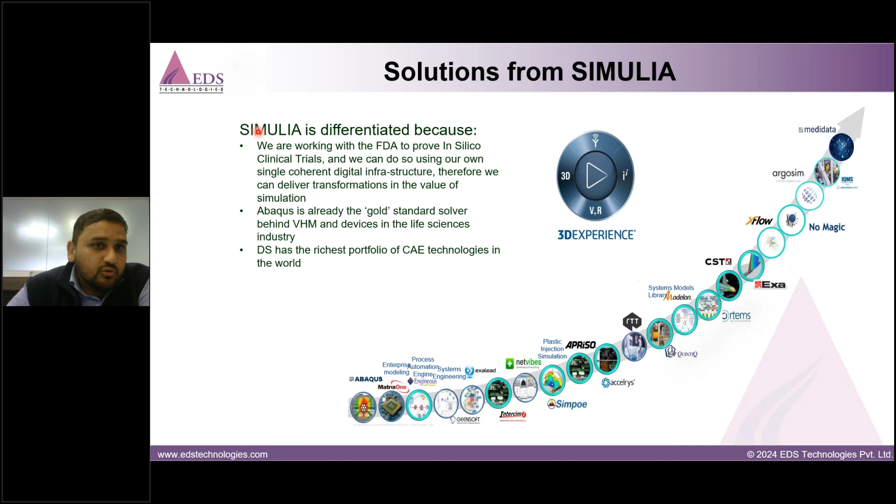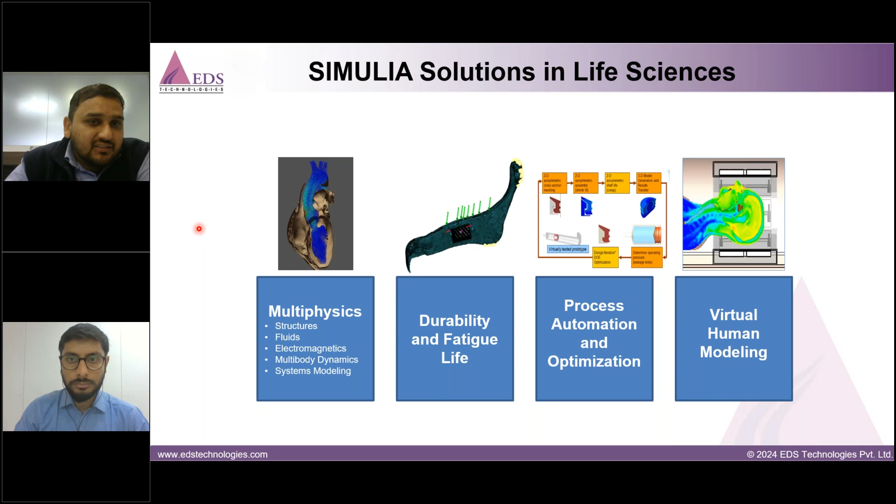And the fourth one is virtual human modeling, where you can scan the body, and you can produce a lot of DICOM images, and these images can be used to make a 3D model out of your scanning data. And then further you can apply boundary conditions and real-time loading conditions to understand the real-time scenario. So these are the sectors that you can tackle without any problem using the SIMULIA tool. Okay, so now we will start talking about those three domains that we discussed.

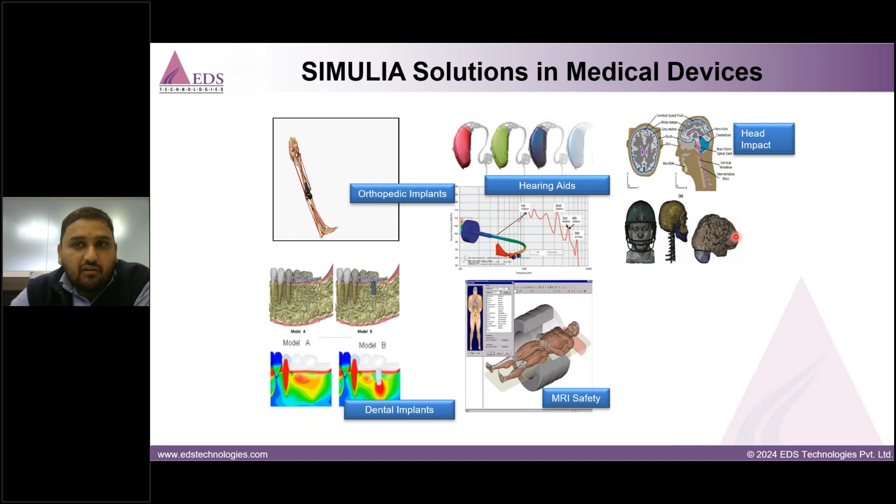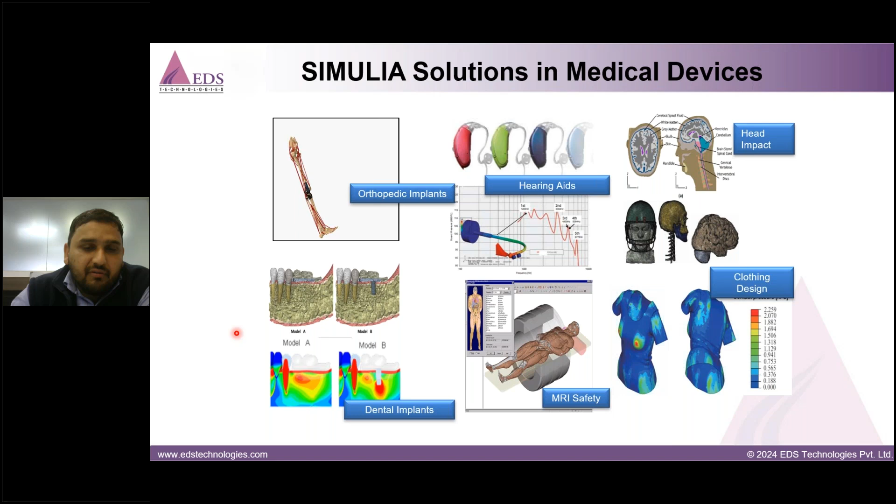These are kind of recent examples that we have done for our prestigious customers across pan India. Obviously we have not included every domain, but most of the things can be considered here.

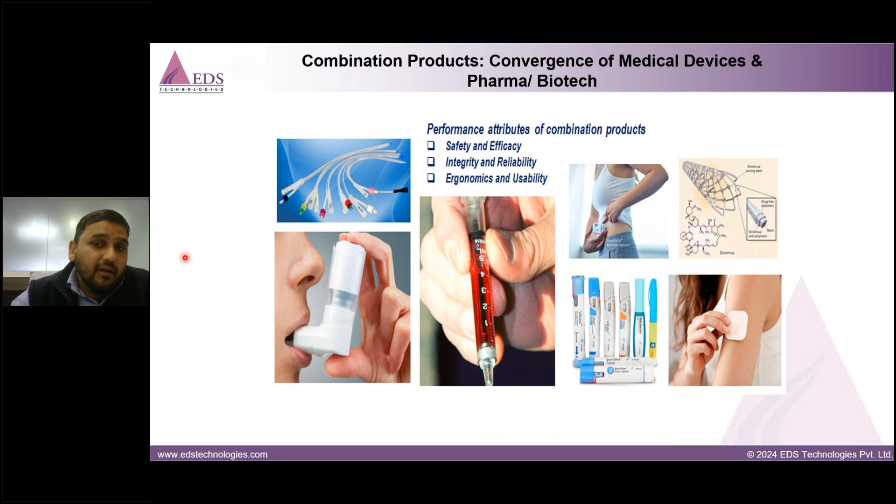Okay, so now considering those 3 points, we have done a few of the studies for our customers, which I wanted to reflect here. Okay, so we will consider different examples, and simultaneously we will talk about what are the key performance metrics and what we would like to achieve using those simulations.

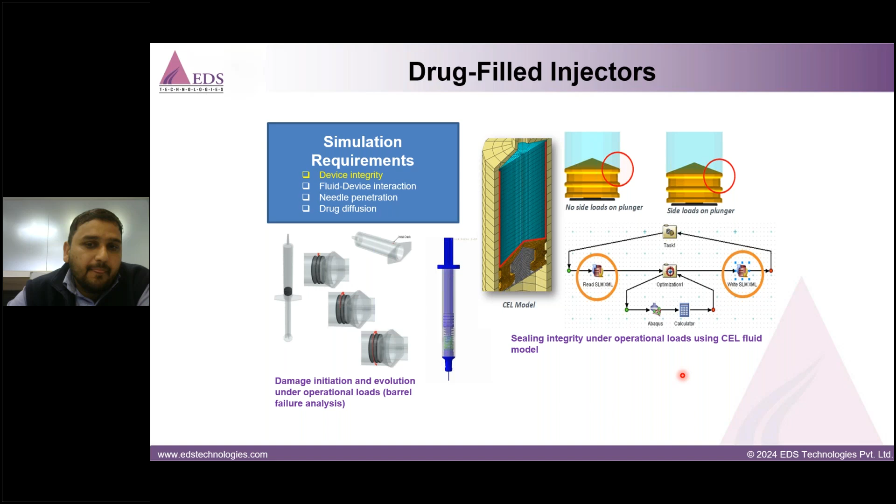And the technique we used here is CEL. CEL is basically the Coupled Eulerian-Lagrangian algorithm. Okay, so if you see, just a second, yeah, this is the animation video. So we press the liquid and it is coming out from the injector, and you can see how it is falling in the specific chamber. So this is basically a 3D flow simulation to optimize the syringe and the needle design for outflow velocity, and to understand the plunger force and where the leakage is, and how we can prevent it.

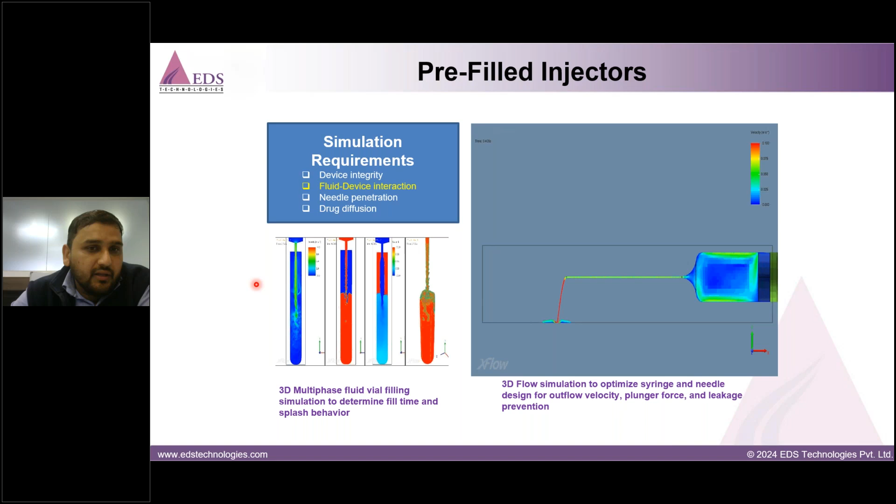So this is a kind of 3D animation video, and on the right hand side you can see the velocity, and on the left hand side you can see the multi-phase fluid filling simulations where you can understand the filling time and the splash behavior. Okay, so this is a need currently in the medical domain, and we have seen a struggle specifically by CAE engineers in how to set up the analysis and what things are required. So do let us know, we can support you. We have medical customers who are doing this activity day in, day out.

So it is again a part of drug-filled injectors, but we have done it in a different way. So we try to cover the third point, which is needle penetration. You can see this animation video we have created using Abaqus. So we have skin layers, which include a number of different layers, and every layer has its own material properties and natural phenomena. So we try to consider them in a mathematical way of modeling. So you can see first we created a hypodermis layer, then a dermis layer, then epidermis layers, and then we define a certain porosity level because it is not that solid, we do have pores. So then we define the porosity level, and then you can apply a solid interaction.

One you can define as a solid. So the needle was considered as a Lagrangian formulation, and the human skin basically was considered as a Eulerian medium. Okay, so then we start the penetration part. So the needle is basically penetrating into your skin and causing the tissue damage.

Okay, so on my left hand side, you can see the biological occurrence of the skin, and on the right hand side, the full physics. So if you ask me, Varun, what is the uncertainty? Is it close to reality? How close is it to the experimental data? So I will not say anything. You can just simply go to these experimental curves and the simulation curve, and proudly say that the result was as accurate as it can be, somewhere around 92%.

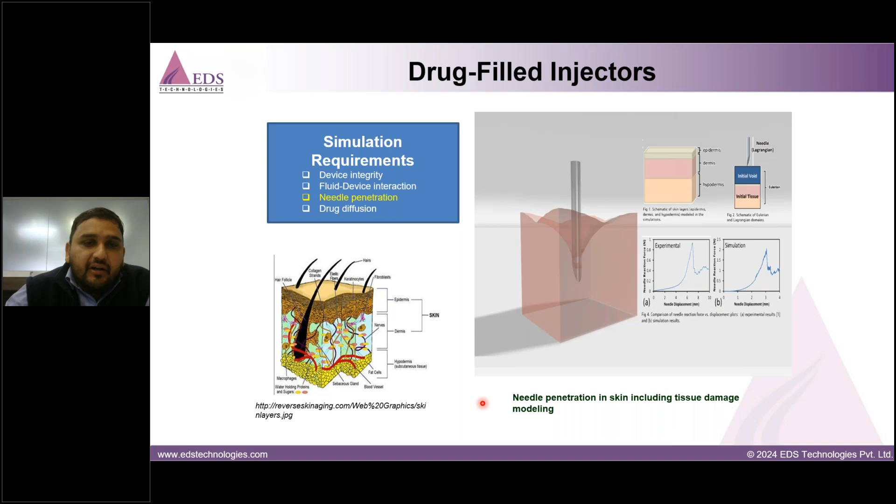And those 8% was delay just because of these properties, because every person has different skin criteria. But considering the generic values, it can give you a result something similar to 90%. Okay, so that's the kind of accuracy Simulia can bring. The other one is the drug diffusion. It's again a simple phenomenon. You create a chamber and then you apply the fluid domain and see the tissue expansion.

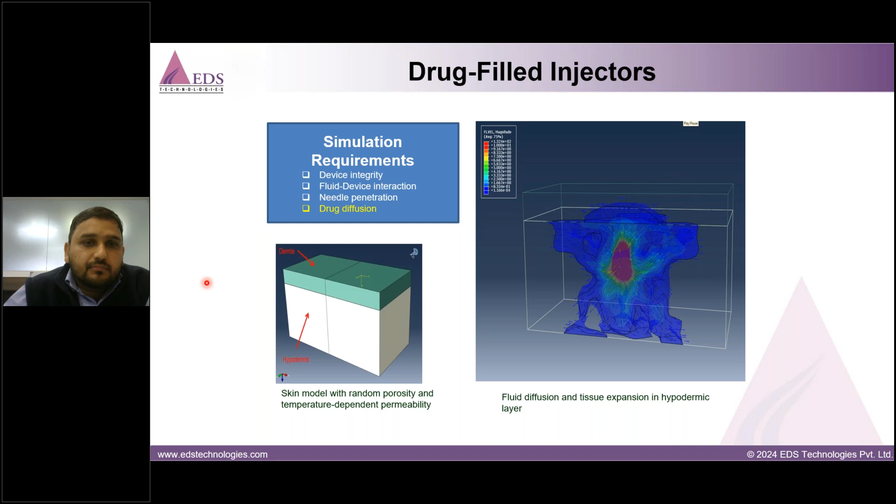Okay, so that's four criteria which we have accomplished using the same model, using the same fundamentals. Okay, so the same fundamentals you can apply in different parts. Considering the skin behavior, you can also perform analysis of how to inject the liquid in the human body, and which specific angle we have to use. So this kind of study has also been done.

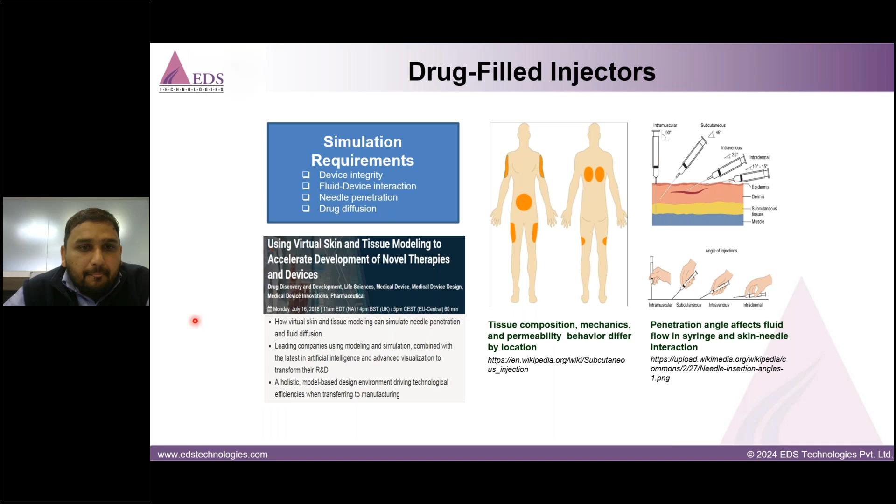So on my right hand side you can see different angles have been used, and different force and different penetration power have been used. Okay, so that kind of tissue composition and biological biomechanics investigation can be done using Simulia.

Then I would like to talk a little bit more about sensors, biological sensors, where you can understand the collaborative kind of investigations. So if you are in the human experience industry, where you want to create an environment for your patients where not only can they heal their wounds, but at the same time they can fully recover from their challenges.

So these are the kind of domains and segments we have created under one of our products, which is called 3DEXPERIENCE, which is like Simulia but in a different environment. So it does have different role capabilities. Okay, so here you can see end-to-end digital solutions were created, and a total life cycle combination happened.

So you can start with some specific challenge, and then you can do design and development, and then you can do the simulation parts, and then you can go to the manufacturing section where you can do the production part, and then you can do the enterprise operational excellence where you can individually monitor the performance of your product. Okay, so that kind of experience can be done using any of the advanced levels of technology.

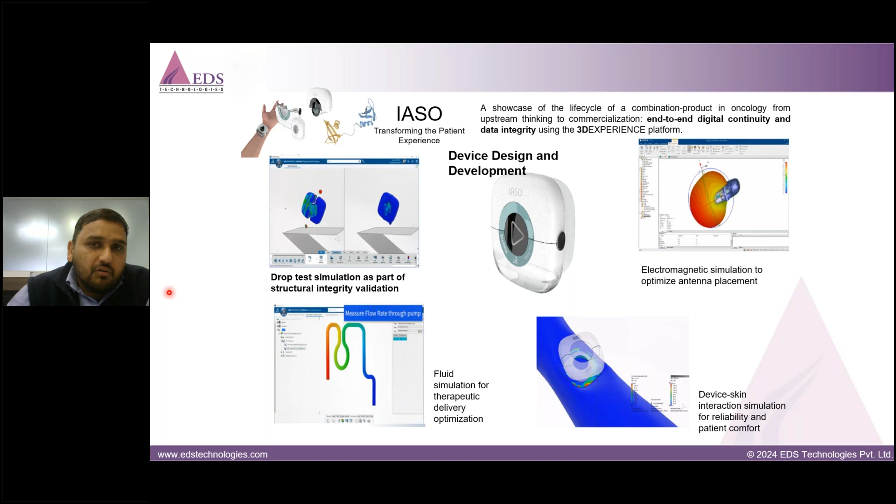So it's a step-by-step process. First you do the structural mechanics, then fluid domains, then a Maxwell-based solver, then you perform a finite element based solver. So different solvers were integrated, and we have created one combined joint study.

Okay. The second case study that we can reflect on here is drug-eluting stents. I know a lot of manufacturing companies are currently working on this specific domain. And when we started this work with different hospitals, with different industry segments, we came to know different requirements have been simulated using this tool. And we tried to create some fundamentals.

And on my left hand side, you can see the first intention was to understand the material behavior, how to perform the in vivo dynamic loadings. Life cycle is one of the key criteria, and optimizations, then blood flow modeling, and finally the pressure driven diffusion. Okay, and obviously there are certain criteria for the performance metrics which are reflected on my left hand side here.

We will not go into detail about the biological aspects of the human body and how this artery is developing. It's a slow progress happening over a period of time, considering our unhygienic lifestyle. So they try to create some dynamic kind of stents.

We started first with material behavior investigations. We don't just jump into the model part and create it. First we try to understand the fundamental principle, like how the physics is taking place, which material is best, and how the stress phenomena is taking place. These are stress-strain plots where a lot of hysteresis develops under different loading and unloading conditions. We also try to see the behavior in the form of material transformations like martensite or deformation rate, and then we started the designing part.

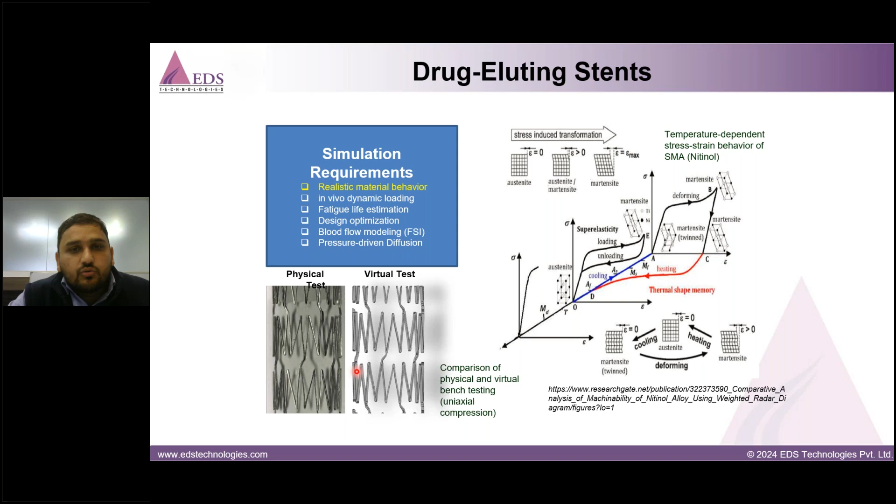Most of the time, nitinol material is the one used by many industries. We have also used the nitinol material. It was created smoothly in CATIA environments, and then we have done the simulation part in Abaqus. On my left hand side, you can see the physical test, and here is the virtual test.

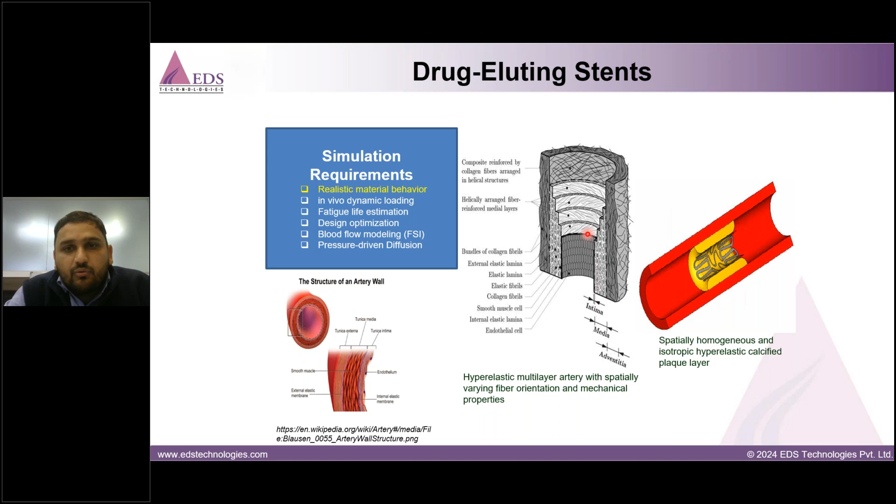This is to get into more detail. We try to deep dive into the stent phenomena, and we wanted to understand how many layer formations there are, same like human skin, but what is happening inside the hearts. How the multi-layer artery is working, and which material we need to define as hyperelastic or simply elastic conditions. To make it very much realistic, we try to understand a little bit about the biological aspects, and then we created this model. We have done this crimping, expansion, and insertion part here.

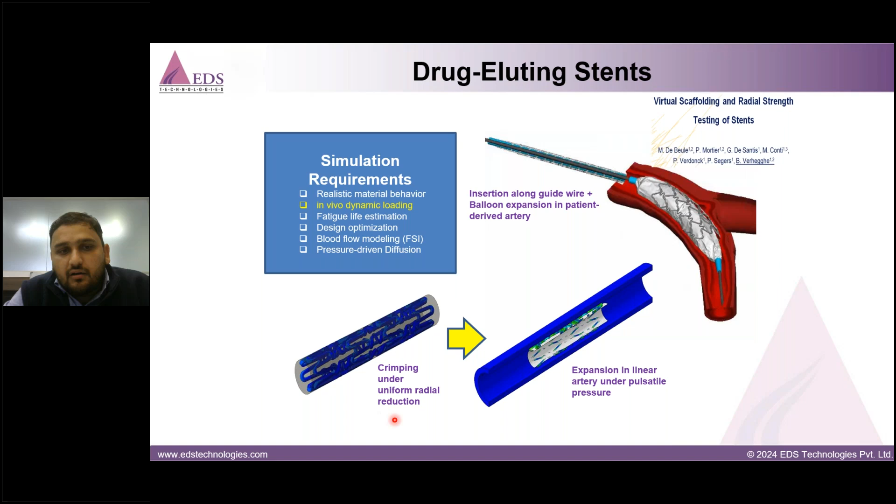This project was done for AIIMS and PGI Chandigarh. We supported them in creating this model, and they have deployed the stent in the human body without any problems, and the result accuracy was also very good. You can see how realistically it can be done under different dynamic loading conditions.

This is one example we would like to show, a great project created by the Dassault team. You can see the stent here. Let me maximize it. This coronary stent is subjected to cardiac cyclic motion in a living heart model. That model was created by a team of panelists into the medical domain, into the simulation sector, as well as the medical sector. Jointly we have done this project, and you can see it is very much beneficial to understand the physical significance of the stent in terms of cyclic motion.

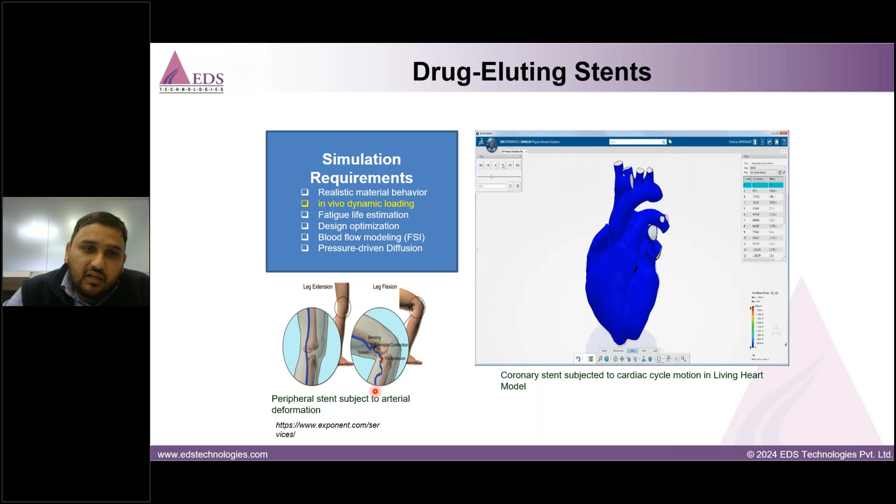The same thing can be deployed in other parts of the human body. Here, a peripheral stent is placed to understand the arterial deformations. That is also nowadays into consideration.

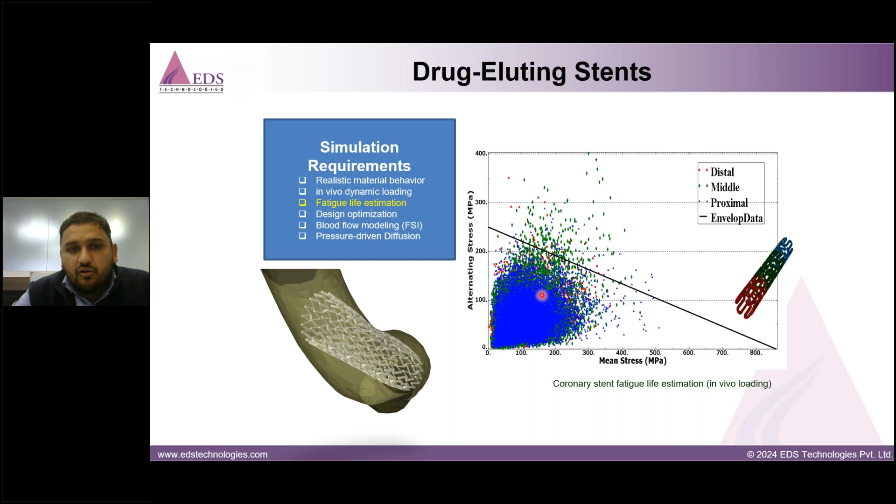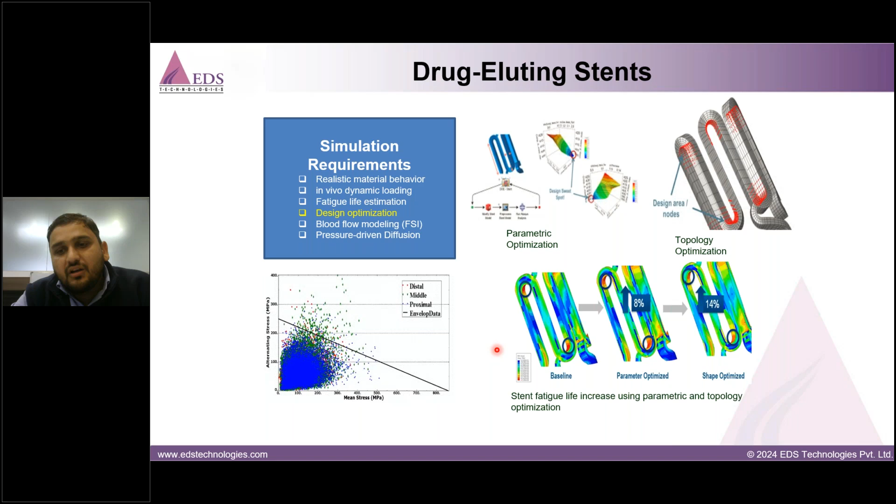Considering those parameters, a lot of improvement has been done, and if you see, local stresses from the beginning till the third stage have been improved a lot. These kinds of possibilities can be achieved through topology optimization.

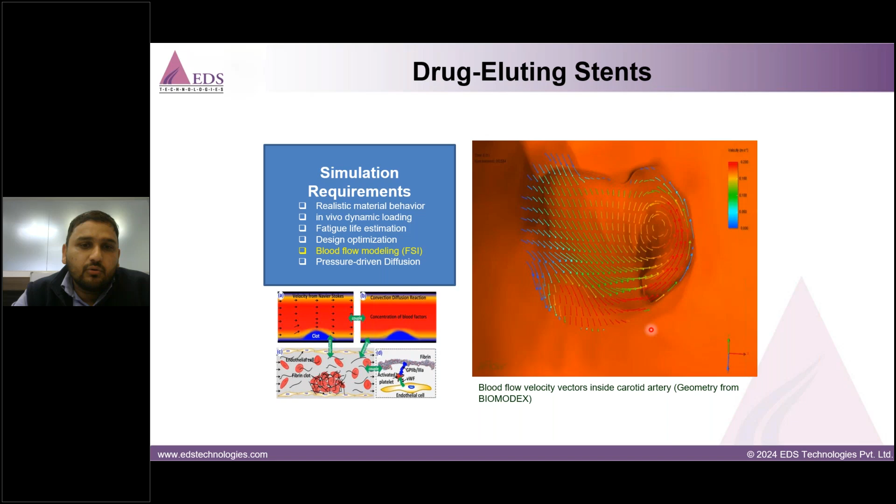And we also understand the velocity vectors, how the blood flow is taking place when you deploy a stent in the human artery. So this is a kind of vector sign that can also be used, but obviously you can also create a streamline to understand the internal behavior. And these are some of the diffusion vectors and concentrations of drug inside the arterial wall to understand the sensitivity of the stent geometry and the contact pressure between the human blood and the stent.

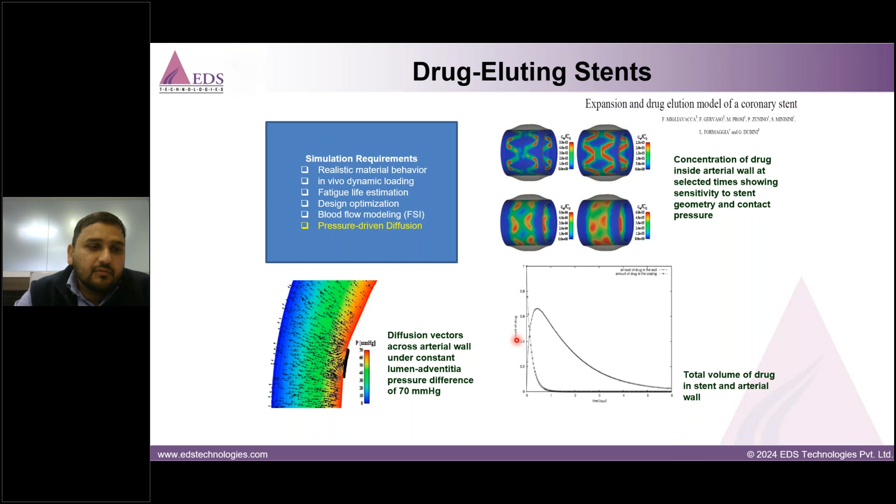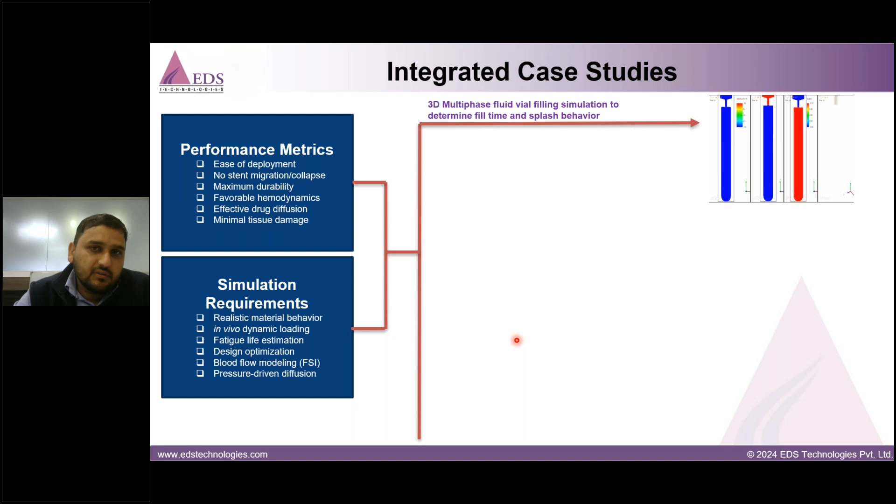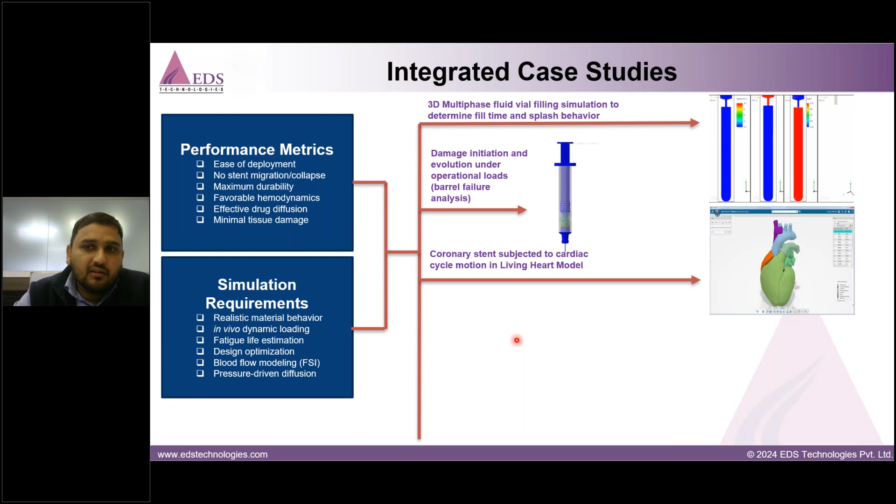Okay, so now I would like to create one nutshell for all the case studies that we have discussed, in one particular slide. These were the criteria, metrics and requirements, so you can create 3D simulations of the liquid and solid model. You can understand the initiations and evolutions under different loading scenarios, understand the coronary stent behavior, and create mechanical loading conditions like crimping, expansion, and obviously a kind of penetration can be done here.

So considering medical device as one of the prime importance, these are the basic analyses where a lot of manufacturing industries are struggling day in and day out. So I would request you try to use Simulia, considering the accuracy and the possibilities we have, and it can definitely give you a better enhancement.

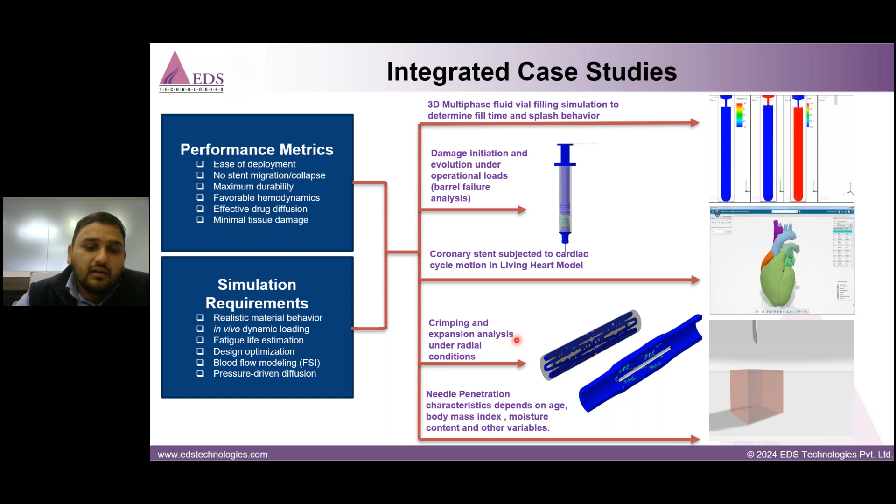In terms of medical device industry, one more example I would like to reflect here is Nimhans Bangalore. Recently they have used Simulia. They have scanned the human body, specifically the brain part, and tried to identify the tumor in the human brain. It was initially very difficult for them to decide which solver to use, considering the accuracy. Proudly I can say we were in touch with Dr. G. Venkatasubramanian from Nimhans, and we supported them to create the 3D model and identify the stress localization in the human brain, so that they can stop the growth rate of the tumor.

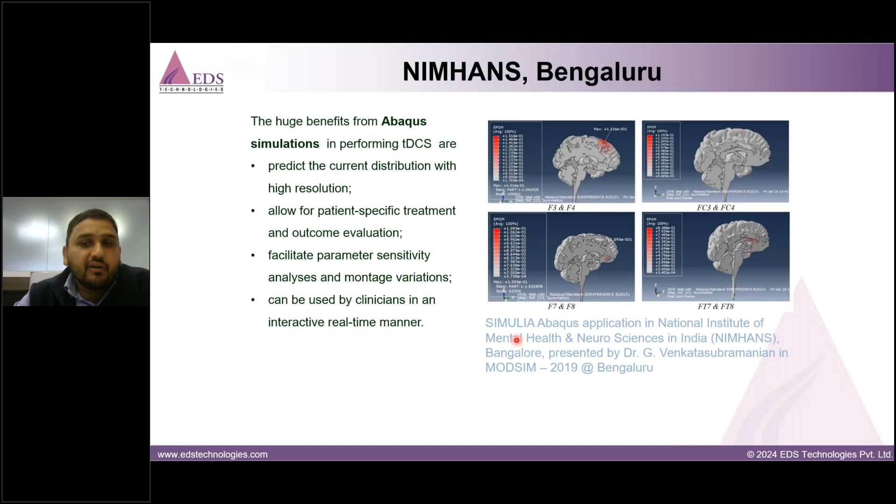So in a nutshell, let's conclude it. Considering this fast growing domain, we know it is very challenging and difficult, specifically for a CAE person, to design such components in an efficient manner. But we can help you in that sector. We can help you create the workflow, and we have a tool which can help you create all levels of physics, starting from the preliminary stage till the deployment section.

We have a lot of tools, different algorithms and technologies at different stages, which can make your experience easier. And it's not just to create something digitally, but at the same time it can help you start with the basic data-driven project, then create a virtual and reality model, and those models can be used to make a human model in a digital environment that you can use further for your expansion. I believe everybody wants to grow, and we believe this tool can not only help you with the designing aspect, but like we said, FDA and other proven industries are working on this kind of tool to make it a universal tool that can be used for all your processes.